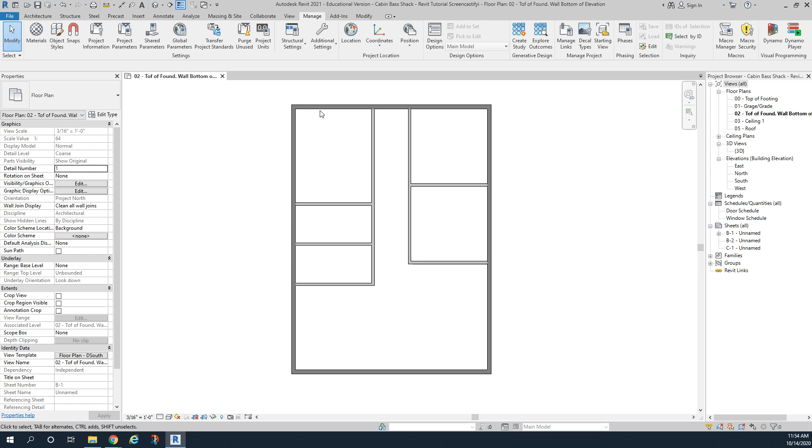The next thing we're going to do is we're going to add our closet at the top and a couple closets near the bathroom and add some doors. So I'm going to go back to the wall command. I click on architecture wall and we're looking for the DSouth wall. And I'm just going to kind of come where I think it's supposed to be in this area. And it roughly is about 6 foot from the edge.

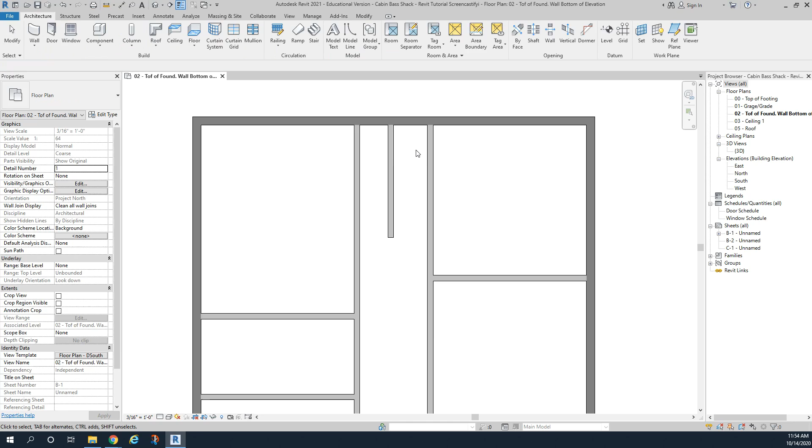I'm going to draw mine wrong actually, just in case, because many of you will accidentally do that. And I can tell that this is definitely not in the correct spot. I'll look on here and I am going to tell you right now that this wall should be 6 foot from here to here. But I see that it's measuring from the middle of the wall and we want it to measure from the inside. So we will use the case where we will create our own dimensions. And I want to dimension by clicking up here on the aligned dimension.

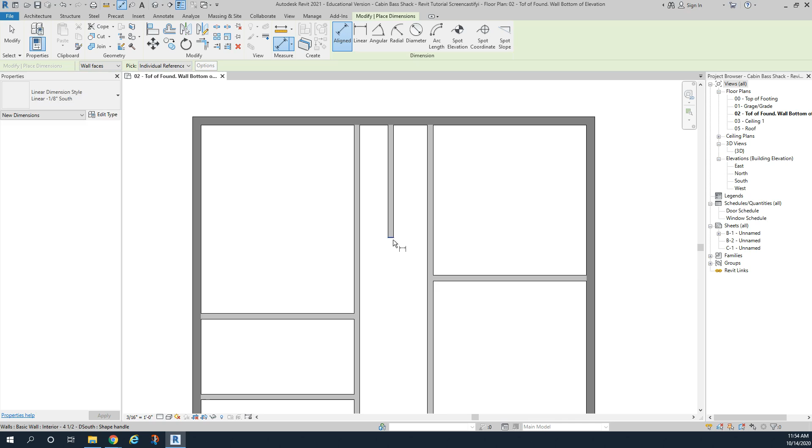And I want to measure from here to this spot. And it says 7.6. Clearly that is not correct. I want it to be 6 foot. I place that on 6 foot. So that's the wrong dimension. We want it to be here, 6 foot. And I can see that that is now correct.

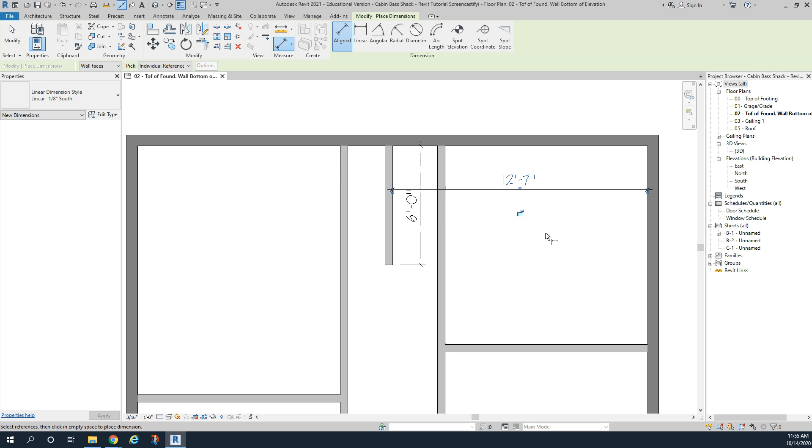I also know that it's 12 foot 5 for the dimension from the edge to the edge, 1 click, 2 click, and then where it needs to be. This wall is not in the correct space, but it says 12 foot 7. So I want to move this wall, the blue wall. Definitely do not click on the outside. 12 space 5, and now my wall is perfectly centered.

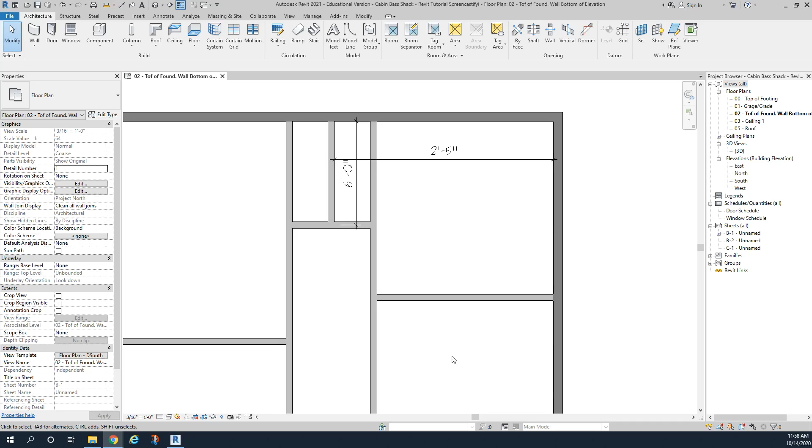I'm going to add the back of the closet here. I love to right click, create similar, and we're just going to go ahead and add the back of that closet, and we're going to leave that blocked in right now. That closet is done. We're going to do a very similar process. Okay, we're going to move down to the bottom here to our next closet.

And this process we're going to use the pick walls and offset command. So I am going to right click on here and do create similar. And the modify menu comes up. And I am going to the options bar and I'm going to type in 2 feet. And I have the pick lines command. And I'm going to go down here and we're going to pick a line. And we want this to be offset 2 feet. You want to click on the bottom here to offset there. And you can see it creates a wall automatically that is 2 feet.

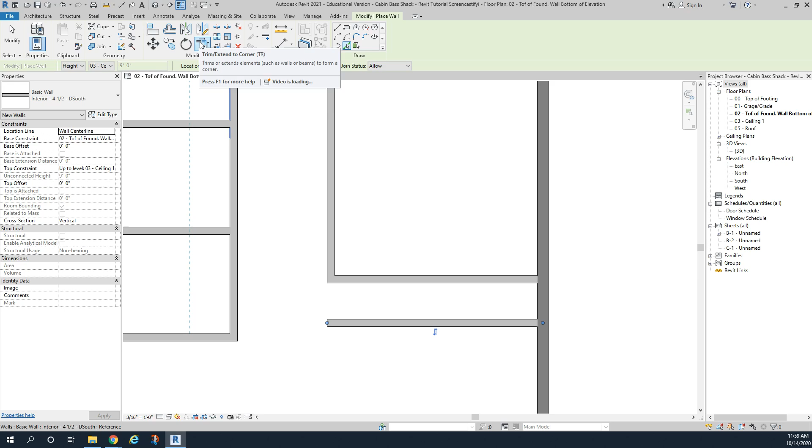I'm now going to go up to the trim command, which is a command you need to have good control of. Click on trim, and I'm going to tell this wall and this wall to come together. And then we'll do one more. We're going to go ahead and create a wall in the middle. So I'll go back up to architecture, wall, and I'm going to draw this one pretty close to the middle here. And we'll just go ahead and check these dimensions to see.

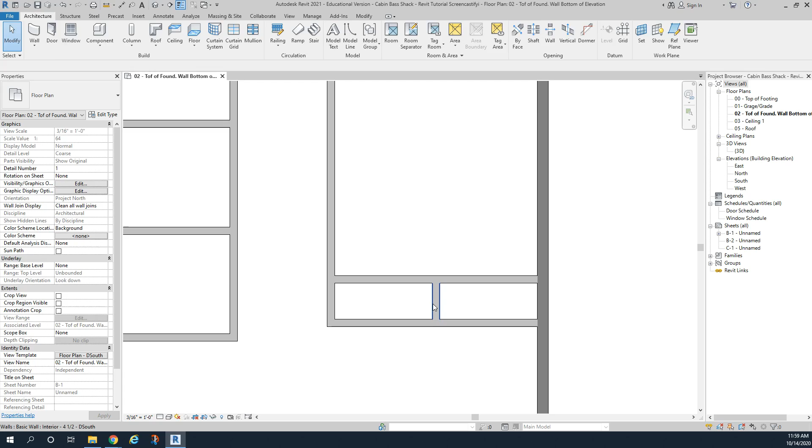The dimension is supposed to be 4 foot 10. So I will draw a dimension from here to see that it is exactly 4 foot 10. So if that one's 4 foot 10, I'm pretty confident the other one would be. You can draw it if you'd like and get rid of those dimensions later. Again, it's a click to the inside, in place. Those are both 4 foot 10.

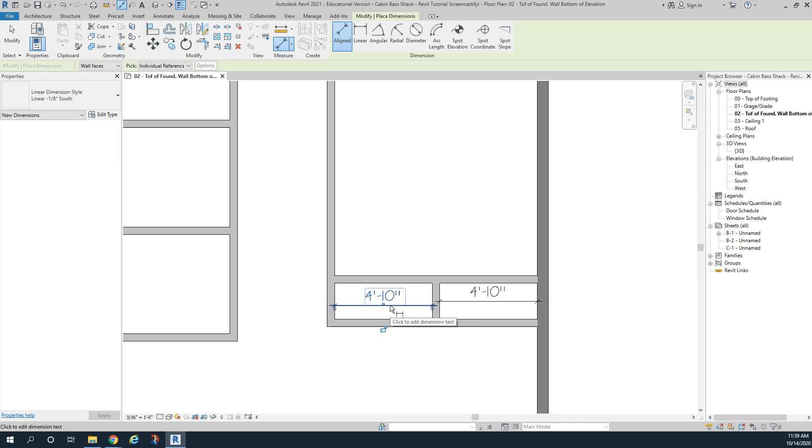All right, up here in bathroom number 1, we have a 2 foot closet as well. We're going to do the same thing. So I'm going to go to architecture wall. In the options bar, I'm going to do another offset. So I will type in 2 feet. I'm going to click on the pick lines command, and I'm going to hit right into this area here. We're going to block that in.

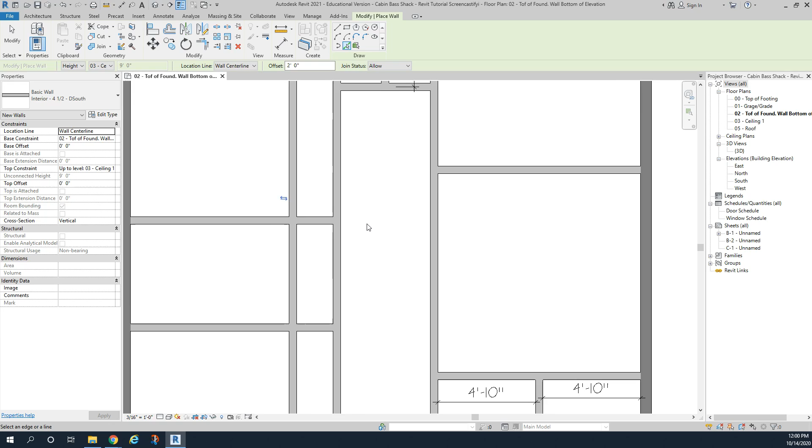But that time, it created a huge long wall. So we'll have a little bit of fun with the trim command. You could either go back. The easiest thing to do is drag this down and say, well, I'm now going to drag this up into this area and put it back. So the offset command can be really good if it's the same size wall. If not, you're not in a really bad shape.

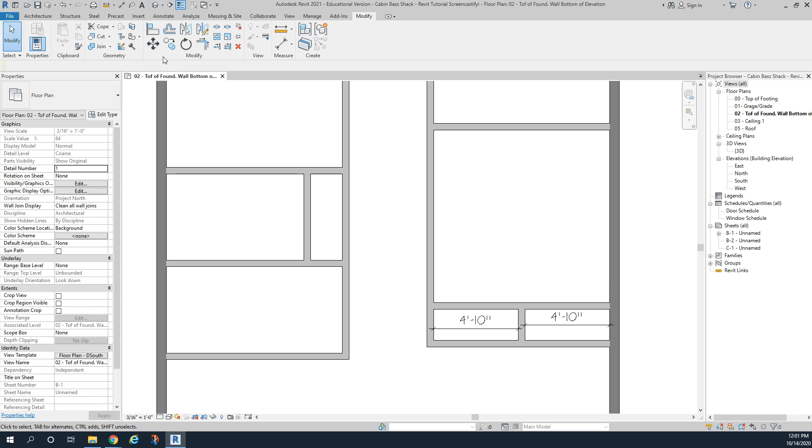We'll go through and we will dimension this as well and make sure. It looks like I didn't grab it correctly. So whatever blue wall we hit is the one that's going to move. We need that closet to be at 2 feet. So we have completed all 3 closets. We're now going to go put in our windows and doors.